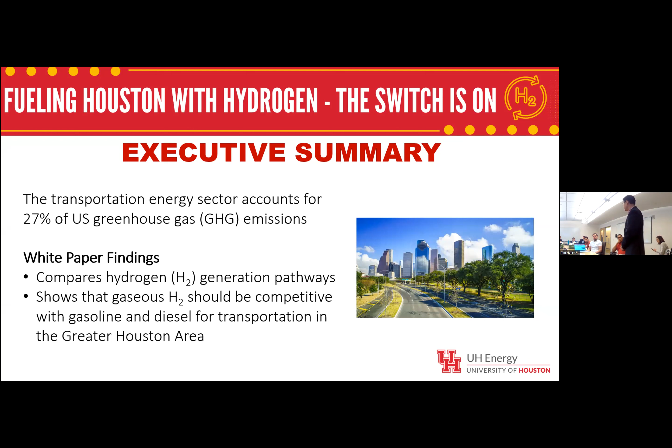Moving on to the results, we use Department of Energy tools such as H2A from NREL and also HDSAM from Argonne National Laboratory to facilitate straightforward analyses. Grid hydrogen, and by grid hydrogen we refer to hydrogen generated with electrolysis using electricity from the Texas grid, is more expensive than methane-based generation options. Current tax credit incentives are helpful, but not necessary to make hydrogen fuels cost competitive.

Because of the infrastructure in the Houston area and being able to repurpose much of the infrastructure, such as pipelines, roads, it is an ideal location for a gradual switch from liquid fuels to hydrogen. Industry in and around the Houston area generates one of the largest amounts of hydrogen in the world. One of the results here you see is the SMRCC, which I'll go into more detail about what that means, is $6.10 per kilogram of hydrogen. And that relates to a gallon of gasoline equivalent of $3.04.

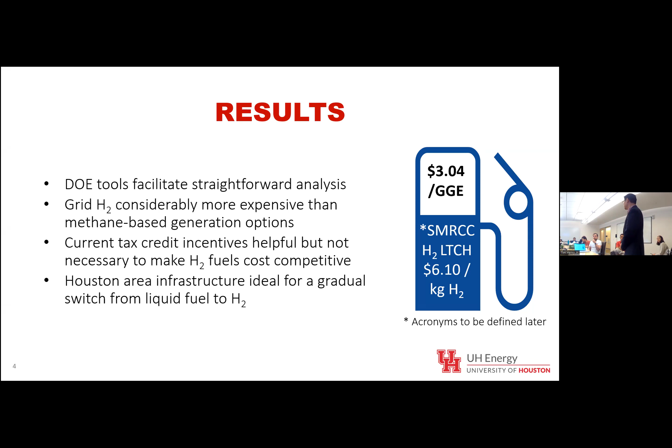For comparison purposes, we computed levelized cost, which culminates into the levelized total cost of hydrogen, as you see here. This includes the levelized cost of hydrogen, LCOH, the levelized cost of hydrogen transportation, LCT, and levelized cost of hydrogen associated with costs of refueling stations for consumer sales, or LCRS.

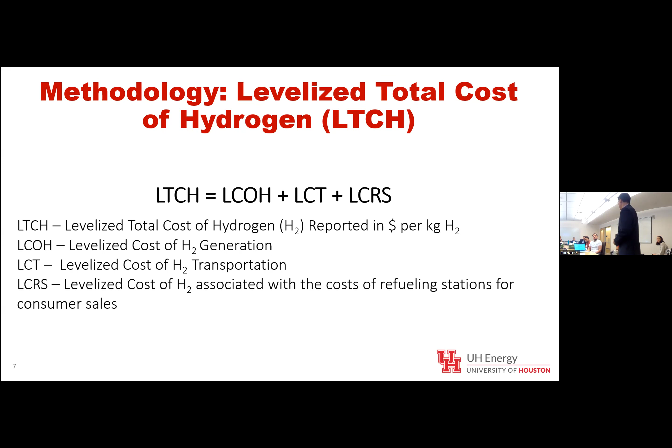These costs are related to independent companies performing these tasks. Now, these may be conservative because a vertically integrated company may be able to outperform these numbers that we will show. The levelized cost of hydrogen includes the levelized feedstock cost, the levelized capital cost, and the levelized operating and maintenance costs, which includes the fixed and variable costs.

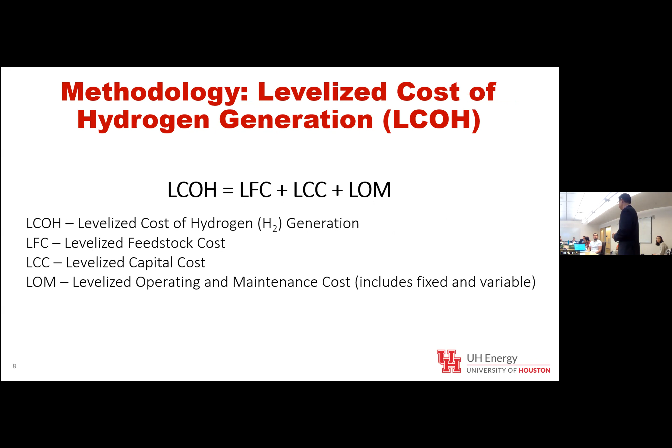Hydrogen generation pathways are many, but we look at 5 of them. Steam methane reforming being the most common. Steam methane reforming with carbon capture, or SMRCC. Grid hydrogen generation and electrolysis. On-site SMR and on-site electrolysis. The first 3 relate to hub type of hydrogen generation, which require transport of hydrogen to refueling stations. The 2 on-site ones are at or near refueling stations.

Grid hydrogen generation, there are different types of technology. We looked at polymer electrolyte membranes, which is not an inefficient type of separation of hydrogen, using an anode and cathode to separate the oxygen and hydrogen. And the on-site ones are basically, as I mentioned, at or near the refueling stations.

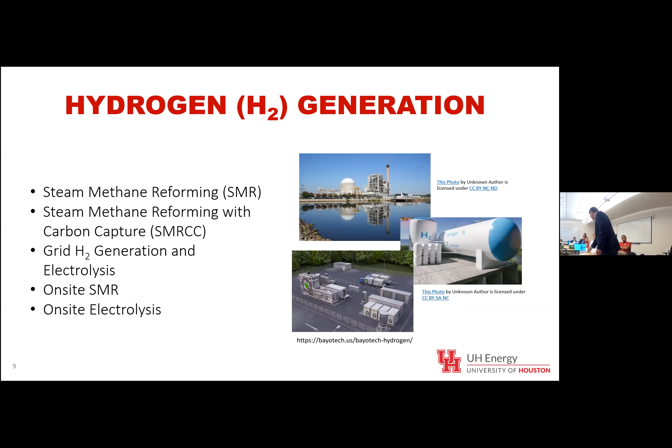As I mentioned, there are different feedstocks for the different hydrogen generation pathways. The first is water. In the Houston area, there's abundant amounts of water resources. 450 million gallons per day are being treated by the city of Houston. The city of Houston has 1.2 billion gallons per day of surface water rights, and 200 million gallons per day of groundwater supplies.

Analysis shows that only 1.1% to 2.4% of Houston's total available daily water rights are required to generate hydrogen for every light-duty vehicle. We assumed about 5.5 million light-duty vehicles, based on the registered vehicles. And these require 4 million kilograms of hydrogen per day to refuel, based on a refueling of 5 kilograms of hydrogen per week.

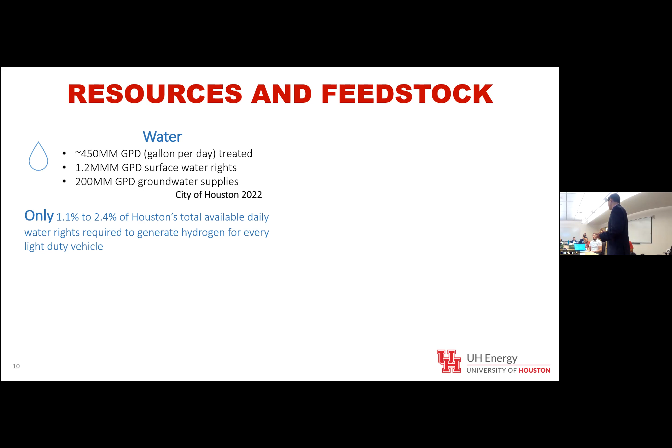Natural gas is of course abundant in the United States and also in the greater Houston area. You can see here on Zoom the visual. The natural gas is actually being transported throughout the United States via pipelines. Electricity, grid power for ERCOT, the current mix is about 38% low or zero carbon emissions. These include nuclear, wind, and solar. Natural gas is 42%, coal is 19%, and other fuels is 1%.

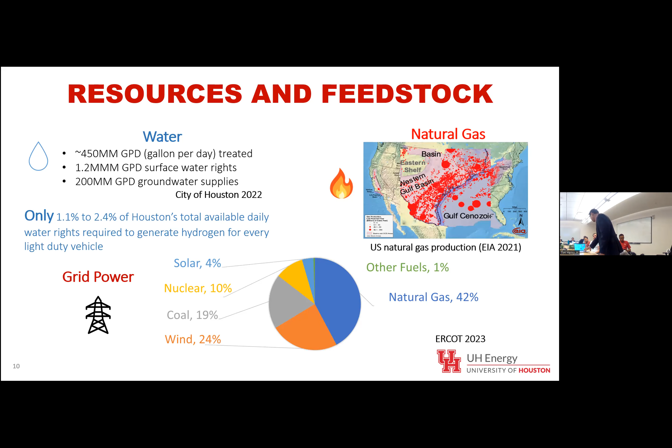We use a value of $10.97 per 1,000 gallons for water costs. For electricity, we estimated 7 cents per kilowatt hour. This is for industrial use. For natural gas, we looked at $3.32 per MMBtu, and this is the average for the first 3 months of 2023, as reported by the EIA in the Greater Houston area.

As you can see, SMR, SMRCC, and on-site SMR are the lowest cost compared to electrolysis and on-site electrolysis. Electricity cost is much more as compared to the other. We did analysis where we arrived at about 222 kilowatt hours required per day. And for SMR it is about 6 kilowatt hours per day.

The model we used for our inputs was used for an actual SMR facility that was built, and so our inputs were different than what the Department of Energy used, and we'll go into all the results as well.

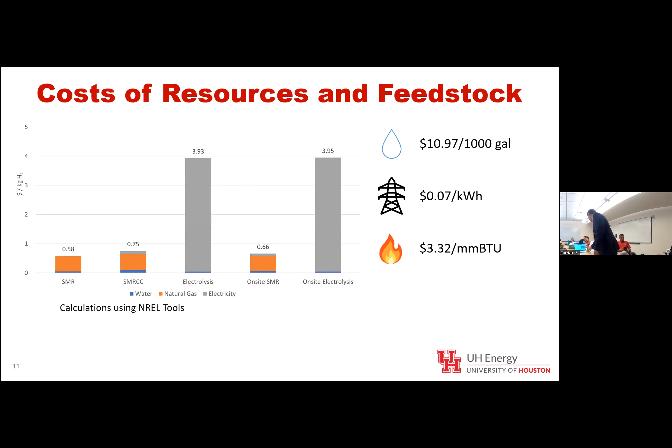From Argonne National Laboratory, we used HDSAM, which is the Hydrogen Delivery Scenario Analysis Model. This provided levelized costs for delivery and also refueling stations. The assumptions are, we're in the city of Houston, population of approximately 6 million people. We're assuming that we're going to store the hydrogen in geological and gaseous form. At the refueling station, we're assuming 1,500 kilograms of hydrogen per day. Pipelines for transmission and distribution.

We also looked at delivery by gaseous and liquid trucks, but we are advocating for pipelines, for reasons we will see as economical. It's more economical, but additionally, you have trucks in the beginning where you have to deliver the hydrogen. Eventually, pipelines will be the optimal way.

So this is the one reason why we are advocating pipeline. Pipeline costs are much lower compared to compressed truck and liquid truck, even at 50 kilometers and 100 kilometers. The difference between 50 kilometers and 100 kilometers is about a penny for a pipeline. Compressed trucks is 12 cents, and for liquid trucks is 4 cents.

For each of the transport options, we looked at the capital costs, O&M, and energy and fuel. So for pipeline and for compressed truck, liquid trucks, of course, is the trucks, the pipelines themselves. These are new builds. Repurposing may reduce the costs of transport for hydrogen via pipelines. But you see here the capital costs, the operation and maintenance costs, energy and fuel costs for each of the options.

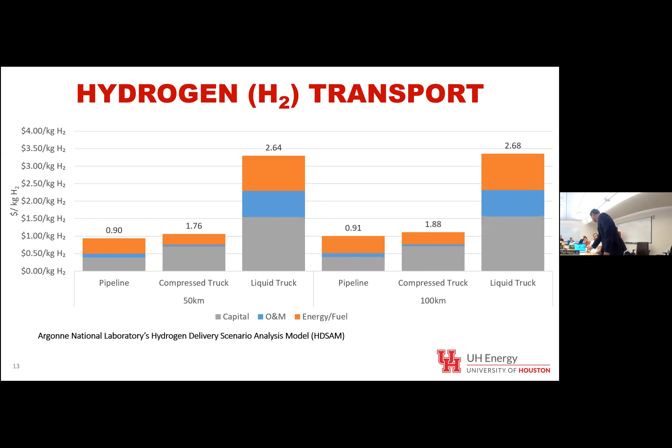So these are three options. Again, it's pipelines. Air Liquide has specific hydrogen pipelines already built that deliver hydrogen within the Gulf Coast area, the Greater Houston area. However, it's for industrial use, and there are no pipelines yet within the city limits of Houston. This is just a photo of the liquid truck or gas trucks.

Now, in 2007, Yang and Ogden did a study to look at the different variables for determining which option is the most economical to transport hydrogen. So look at gas, liquid, and pipelines. As you can see, around 78,000 kilograms of hydrogen per day, the most economical is pipelines at any distance. So again, we require about 4 million kilograms of hydrogen per day. So as you can see, pipelines is the optimal option for the city of Houston.

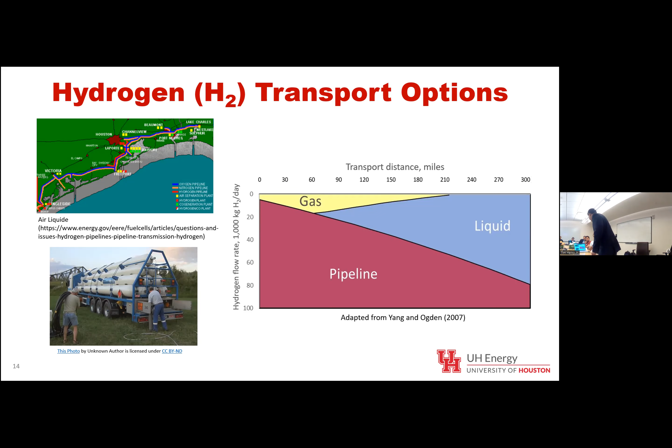So these are capital costs for consumer sales or the refueling stations. We looked at the capital costs for delivering by pipeline, compressed truck, or liquid trucks. Actually, the capital cost for delivery by compressed trucks is lower than the other options. Operating costs for pipeline, compressed trucks, and liquid trucks are shown here as well. So for the capital costs and operating costs, we looked at the refueling station, which includes the dispenser, the compressor, the electrical equipment, and other equipment that's required for the refueling stations.

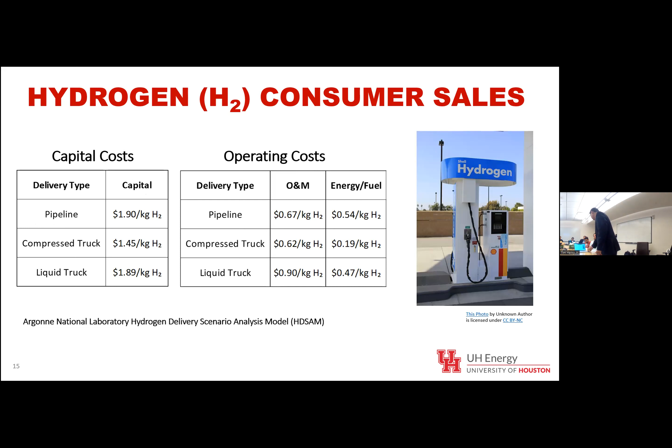Looking at carbon dioxide capture, the total equipment cost for SMRCC, you can see that the highest cost is capture. Capture cost is about 65% of the total incremental cost of $113.60 per ton of CO2. But we broke it down into CapEx, fixed and variable operation and maintenance costs, the incremental cost for storage, transport cost, electricity, and water. This comes to, as I mentioned, $113.60 per ton of CO2, which equates to about $1.13 per kilogram of hydrogen.

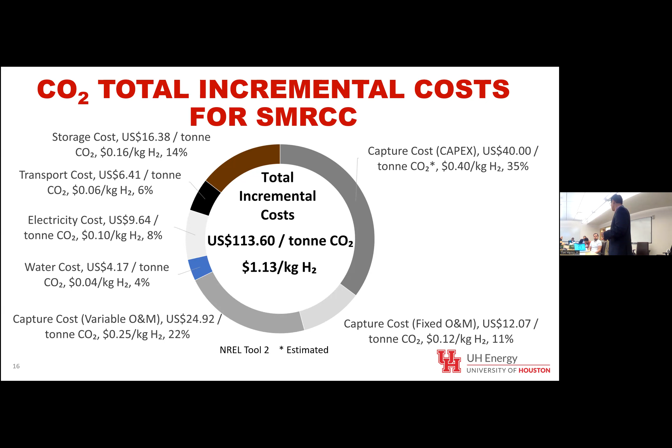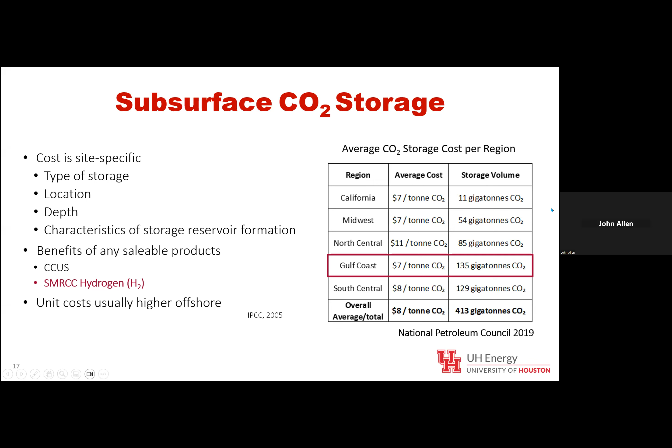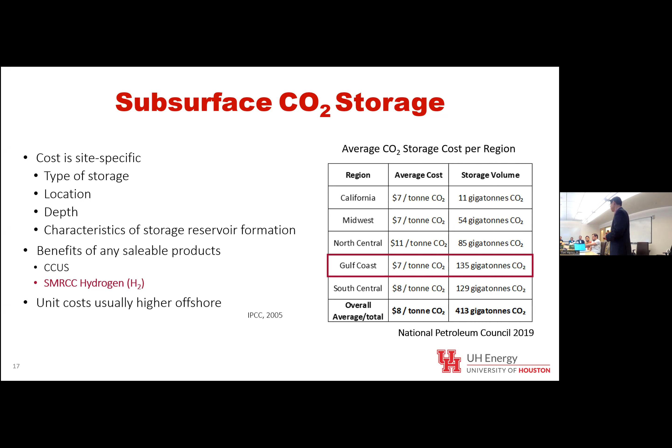So the National Petroleum Council, NPC, did a study and provided an average carbon dioxide storage cost per region of $7 per ton of CO2 in the Gulf Coast area. Comparatively, our storage cost was $16.38, about 16 cents, which is therefore maybe on the conservative side. Now, the benefits of any sellable products may offset these costs. So carbon capture, utilization and storage, and what we're advocating is SMRCC hydrogen. And unit costs are usually higher offshore.

Turning to the government tax credit impact, in 2022, the Inflation Reduction Act provided a production tax credit, PTC, under the Internal Revenue Code, IRC, section 45V. IRA also provided an increase in the 45Q to $85 per ton of carbon dioxide captured, and other increases as well. For the PTC, it's a base rate of 60 cents, but requires 0.45 kilograms of CO2 equivalent per kilogram hydrogen generated.

If you're from 2.5 to 4, you can get 20% of that, which is 12 cents. If you meet the wage requirements and also apprenticeship requirements, then you can have a 5-times multiplier, which then brings it to a maximum of $3. Comparatively to our SMRCC cost, it's much lower than that. But the emphasis here is that our numbers do not include the tax credits. However, if you are able to get the tax credits, of course, it will help the economics of the project. So again, no tax credits are included in these numbers.

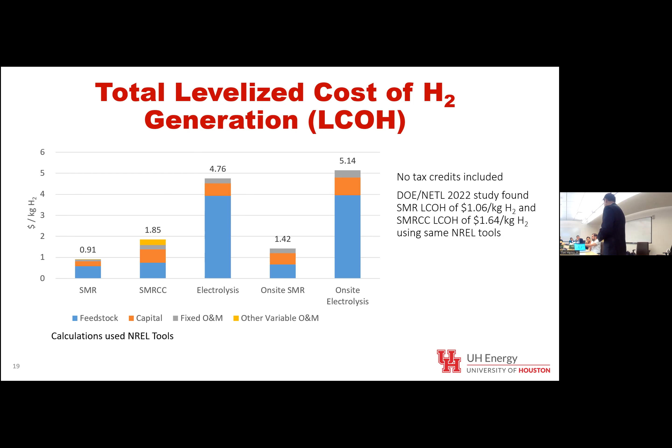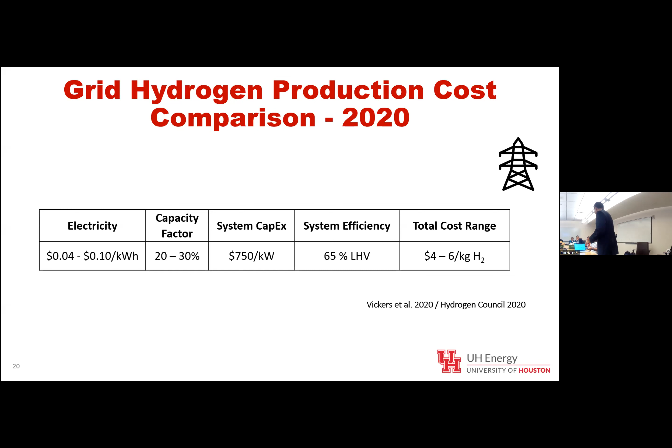I'm forgetting something here. Right, we'll come back to the Q&A.

So again, as mentioned, the refueling station cost is actually the highest cost of the levelized total cost of hydrogen. This is for SMR, and you can see it's about 60% as well, at $3.12 per kilogram of hydrogen. So this includes the storage, the refrigeration, the compression, the dispenser, electrical controls, and other costs. The cost of these components will decrease as technology improves, as well as because of economies of scale.

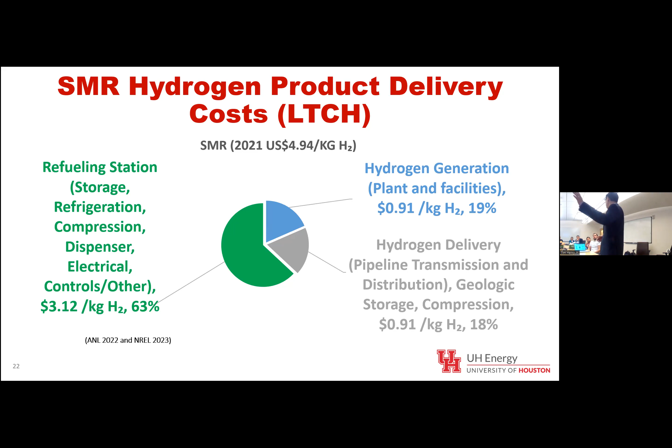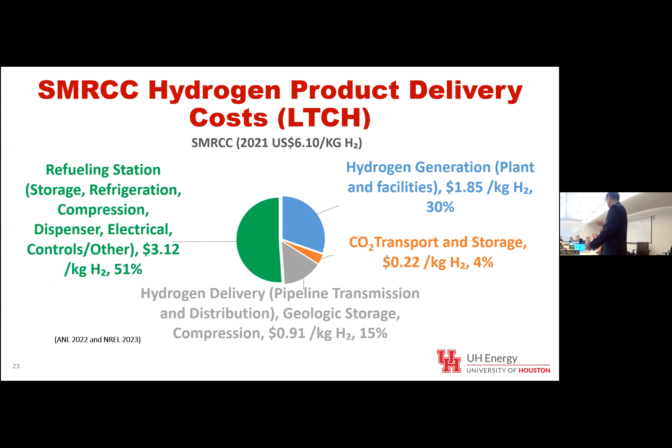And you can see the hydrogen generation cost and hydrogen delivery costs as well here. Again, we are advocating pipelines for transmission and distribution, so you only see the costs for that here as well. For SMRCC, this is $6.10. The breakdown again, the refueling station takes up a chunk of the pie. Those costs can be reduced, I think, and the cost of hydrogen delivery can also be reduced.

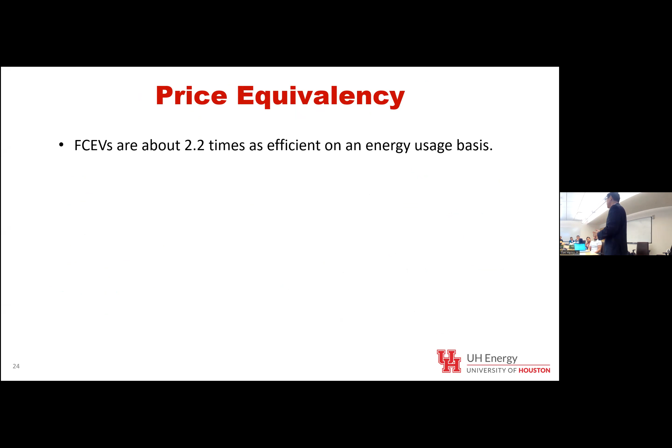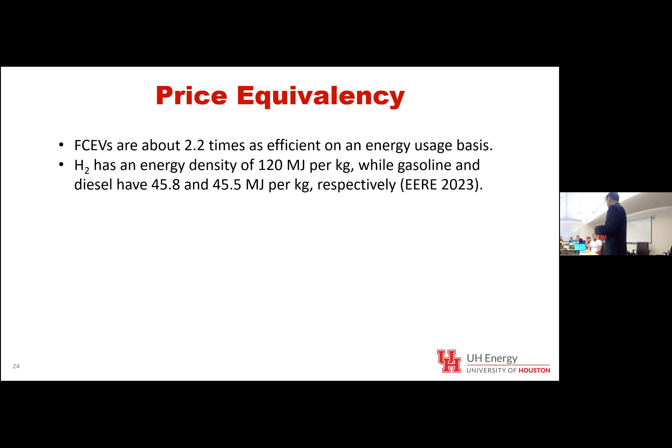Turning to price equivalency. So this is a step-by-step guide on how we came up with the estimation. First, FCEVs are about 2.2 times as efficient on an energy usage basis, and this is based on literature that we have. Hydrogen has an energy density of 120 megajoules per kilogram, while gasoline and diesel have 45.8 and 45.5 megajoules per kilogram, respectively. A gallon of gasoline weighs 2.84 kilograms, and a gallon of diesel weighs 3.22 kilograms. So multiplying those numbers, you get gasoline and diesel hold 130 and 147 megajoules per gallon.

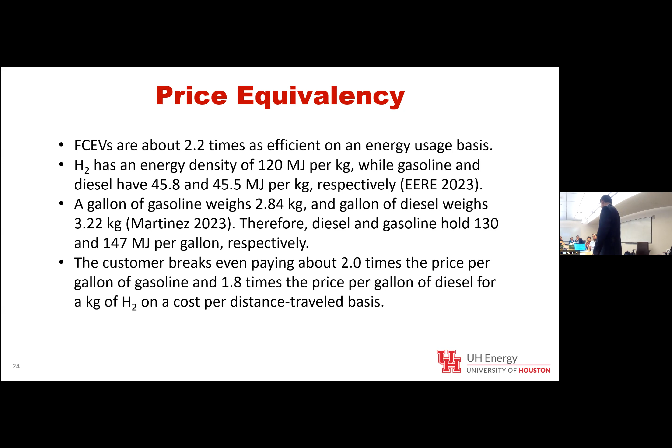Multiplying that by 2.2, dividing the 130, for example, for gasoline with 120, and then multiplying that by 2.2, the other way around, we get the customer breaks even paying about 2 times the price per gallon of gasoline and 1.8 times the price per gallon of diesel for a kilogram of hydrogen on a cost per distance traveled basis. We want to note that these numbers are conservative relative to currently available vehicles.

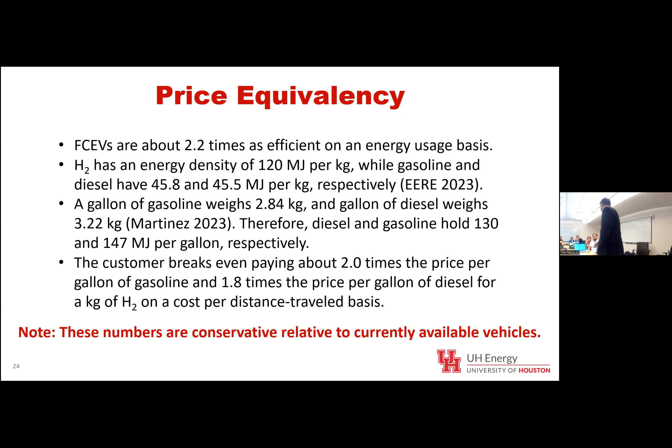So based on the equivalent pricing, we then get equivalent pricing of $2.47 for SMR, $3.04 for SMRCC, and grid hydrogen is $4.40. Comparatively for gasoline, and this is the average of the first 3 months of 2023 in the Greater Houston area, we paid about $2.90 per gallon for regular.

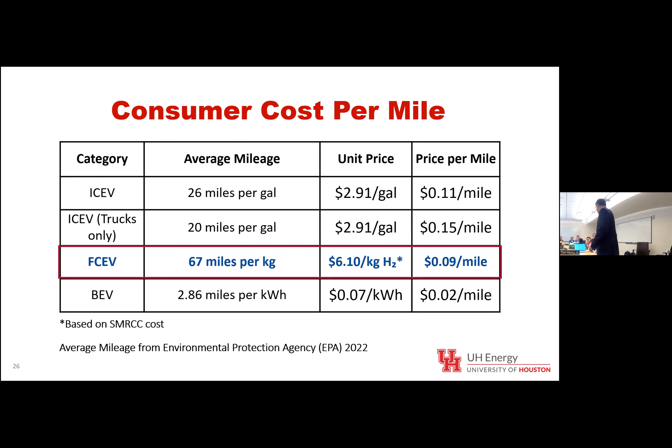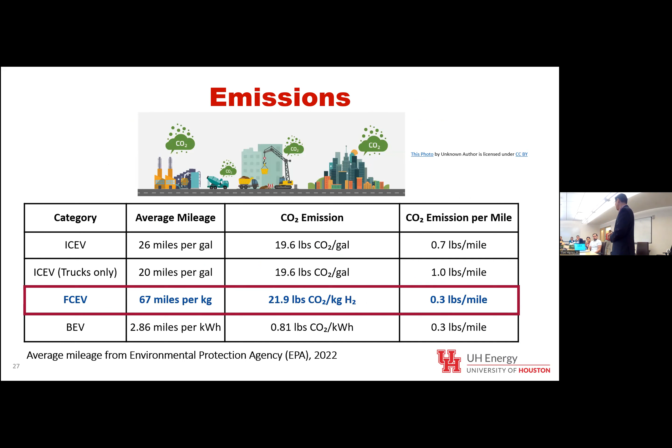Looking at emissions, we looked at the average mileage and the CO2 emissions for these categories, and FCEVs are on par with battery electric vehicles, and lower than internal combustion engine vehicles. However, we must note that SMRCC can be close to 0.

Consumer preferences: we are accustomed to refueling in 5 minutes with internal combustion engine vehicles. We demand abundant, reliable, and affordable fuels. We may prefer access to hydrogen refueling stations like we do with gasoline and diesel. And we may appreciate the lower electric vehicle maintenance costs, having fewer components as compared to ICEs.

So, conclusions: Department of Energy tools facilitate straightforward analysis. Grid hydrogen is considerably more expensive than methane-based generation options. The current tax incentives are helpful, but not necessary to make hydrogen fuel costs competitive. And Houston area infrastructure is ideal for a gradual switch from liquid fuel to hydrogen. Again, to emphasize that government support is not needed for hydrogen fuel switch for the Greater Houston area.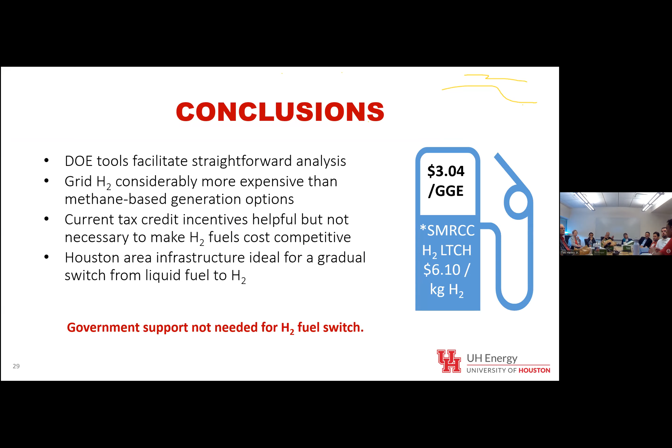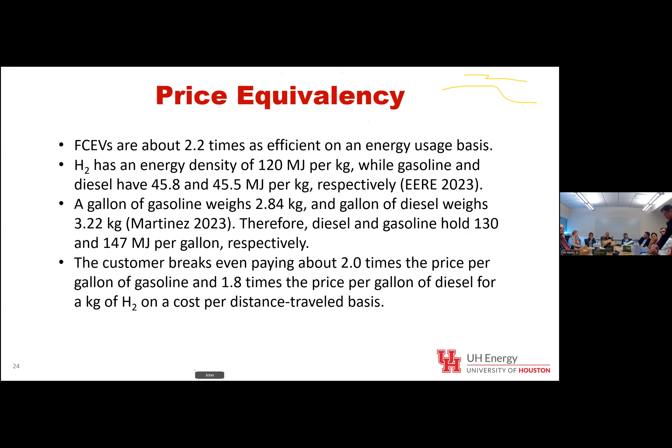On your previous slide, comparing the equivalent to gasoline at 304, is that assumption based on the local steam methane reforming? One of your examples was to have a small steam methane reforming unit actually at the facility. So this number is the hub. Okay. So it's SMR CC at the hub, then generation, and then you need to deliver that. Because those costs are different, you have a lot of additional transportation costs, but for the onsite steam methane reforming package option, you also need a lot of natural gas infrastructure, pipeline, et cetera, to get to that place.

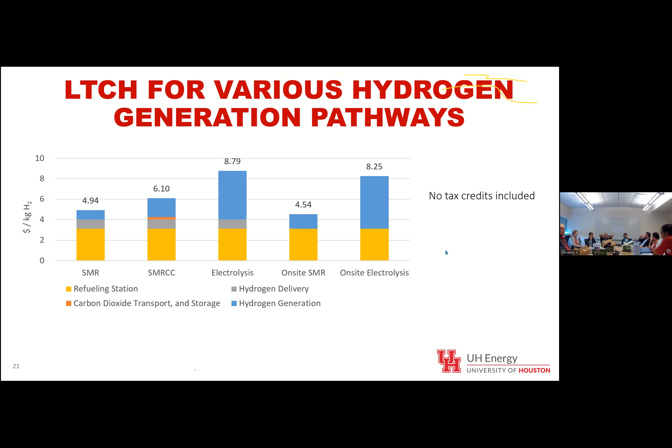That's right. One thing to mention about that 610 number: baked into it is that you capture all the carbon emitted from the SMR facility, but it doesn't have baked into it that you get any advantage for doing so. There's no carbon credit sold in that version of the model. There's no PTC built in. So industry decides to spend the money on carbon capture to have a completely net zero product and doesn't benefit from it at all. And we like that number because it beats everything. If you care about CO2 emissions, that's the only thing right now that solves all the problems.

Just to clarify though, you seem to be asking about SMR-CC on site, which is not priced here. Yeah. And that would require probably pipelining the CO2 away from the stations as well. So for now, we just didn't handle that. But there are trucking solutions. There are isomodal trucks right now that could be used for that as well.

It's a much more complicated system and beyond any scope of the study that we can do, because there's no real world analogs, even though it's definitely doable. There's not a real world analog. If there's an on-site carbon dioxide capture technology, we'd be very interested in it. Yeah, for sure.

And you have to include the carbon capture and storage cost elements. So that is included in the SMR-CC. That's on CC. Yes, that's comprehensive, the full package. CO2 is in the ground and out of the way. That's right. Yeah. I have a question on the water.

You made the assumption that you have plentiful water here in Houston to produce your hydrogen. It wasn't an assumption, we actually worked it. Yeah, but do we really though? Yes. How come I got a water ban right now? I live in the Woodlands, so I'm not in the Houston area, but in the Woodlands we have specific days for watering and you constantly hear about the drought, we hear about how Houston and other areas are all sinking because we're pulling the water out.